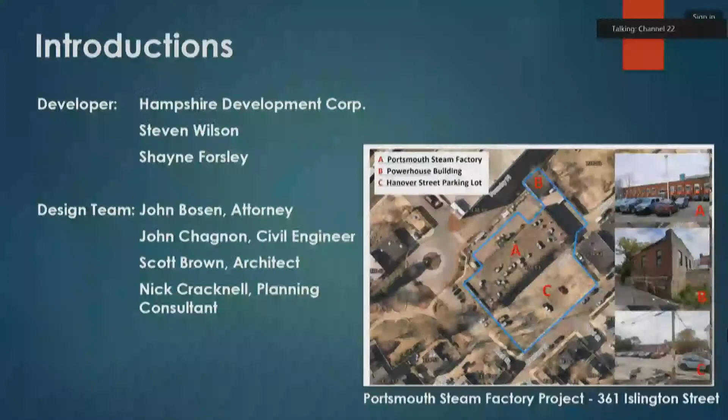If we could go to slide number 2, please. My client owns the property at 361 Hanover Street and intends to redevelop the existing historic building on the site into a multifamily building, and convert the existing parking lot into three multifamily buildings for a total unit count of 48. These 48 units will have all the required parking on site, and it will not be visible to the public. You can see that in slide number 2.

If you could go to the next slide, please. Next slide is the existing conditions, and I'll point that out to you so you can see the size of the lot. I won't go through the existing conditions in detail. They're all there, but I thought it would be helpful if you saw them just to visualize what the site looks like. This property, as you may know, has a long history of industrial and commercial use.

It was built in the 19th century as a 5-story brick and timber structure with a slab basement and a flat roof. In the late 19th century, there was a fire that reduced the building to 2 stories. In the 1950s, the property was used as an automobile dealership. Later in the 70s, it was used as an architectural firm, then a publishing company. Over time, this property became surrounded by residential uses. So there's no doubt that residential use with no commercial intrusion is the highest and best use of this property.

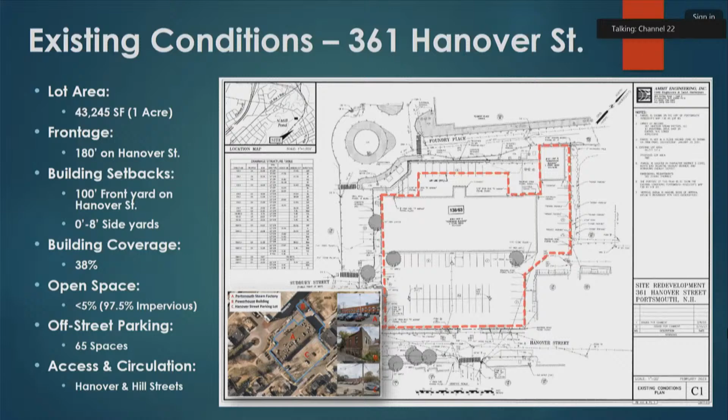Go to the next slide, please. This property is also subject to some complicated zoning. The property is located in the CD5 Character District, which allows for a variety of high-density uses, commercial and residential. These standards allow for 95% building coverage, footprints of up to 20,000 square feet, and just 5% open space. CD5 also allows flat, gable, mansard, gambrel, and hip roofs.

The property is also located in the Downtown Overlay District, which requires ground floor commercial uses, and off-street parking is not required. Lastly, the existing building on site lies within the North End Incentive Overlay District, which allows for an additional building story and requires both community space and workforce housing.

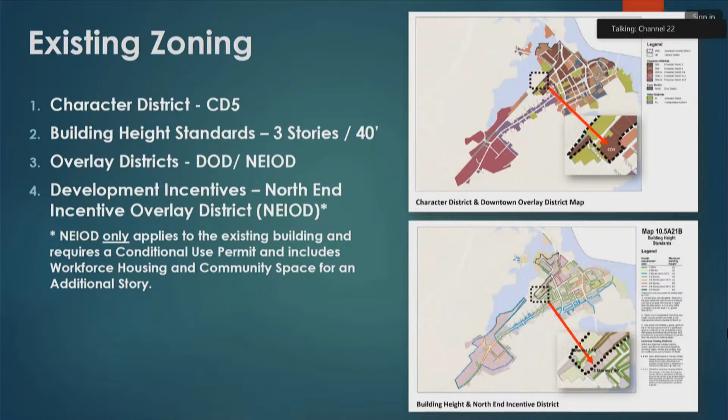This project has already been before the planning board for both a conceptual consultation and a design review, which we refer to as our vested as-of-right plan. If you go to the next slide, that depicts the vested as-of-right plan. This is what my client can build as of right, with no zoning relief.

I want to stress not only to this board, but to the public who've already made comments on this project, that this is a vested project, which consists of a 3-story building with a mansard 4th floor attic. It's 40 feet high, 95% coverage, 5% open space, and meets all required parking. It also has the necessary first floor commercial uses. The total unit count is 36 residential units, 6 commercial uses, for a total of 42 units.

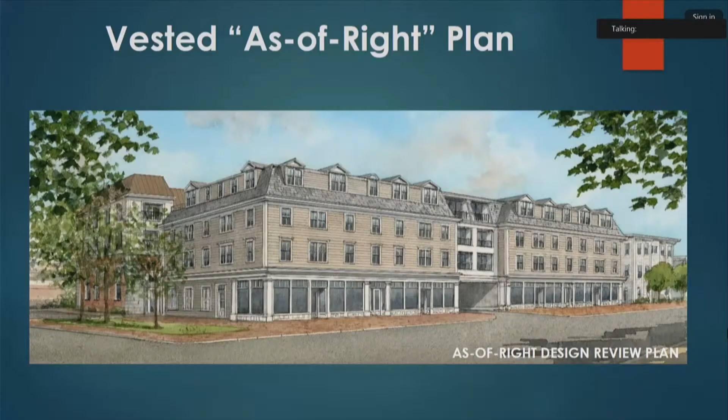After receiving feedback from city staff, many neighbors, and other leaders in town, nobody was really thrilled about the first floor commercial uses in this section of town. Commercial uses require no parking. It brings third parties into a neighborhood. It has the potential to create noise, traffic, and additional lighting.

So we went back to the drawing board and came up with another plan that we refer to as our CUP plan. Ms. Casella, if you could go to the next slide. This depicts what we refer to as the CUP plan. This plan has already gone before the planning board on July 18th for a conceptual consultation that was very favorably received. The CUP plan gets rid of the commercial uses on the first floor, and it breaks up the massing of the front building into 3 buildings.

We believe that this design is much softer for the neighborhood, and the buildings have reduced height and volume and better align with the lower density context of the southwestern side of the site. This plan also proposes to increase the height of the Kearsarge building along Foundry Place to help reestablish volume, height, and the historic characteristics of that building.

The CUP plan also removes the 6 commercial units and proposes ground floor residential uses for all 4 buildings, which is in keeping with the neighborhood. Total unit count for the CUP plan is 48 units. All 4 buildings have been redesigned to be more consistent with the historic characteristics of the surrounding neighborhood. This property is not located in the HDC, but these buildings were designed as if it were.

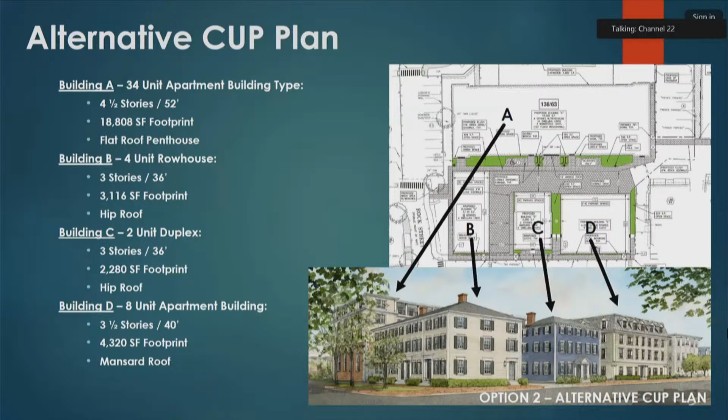In order to build this project, we need zoning relief. If you could go to the next slide, Ms. Casella. This slide depicts the zoning relief we need to move forward with the CUP plan. Primarily, it's relief from the ground floor commercial uses that are required in the downtown overlay district.

Second, we need relief from the minimum first floor height. If we were in the downtown overlay district, the commercial uses would require a 12-foot ground to floor height to support the commercial use, and also to have a ground floor level elevated above the sidewalk for privacy reasons. So we're asking that the first floor height be reduced from 12 feet to 10 feet.

The third variance is for penthouse relief on the Kearsarge building. Penthouse levels are limited to an area no greater than 50% of the gross living area of the floor below. There's also a setback requirement ranging from 8 to 15 feet from the edge of the roof, and these restrictions don't work for this project. We could build a mansard roof, but it's important to understand that the penthouse results in a more attractive building with actually less volume than the mansard, and I'll get into that in a little bit.

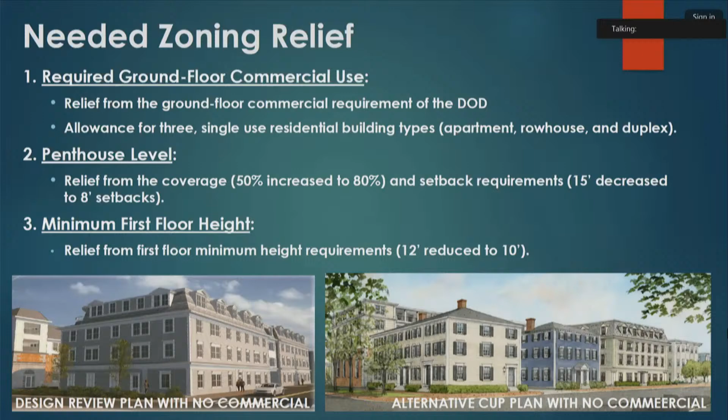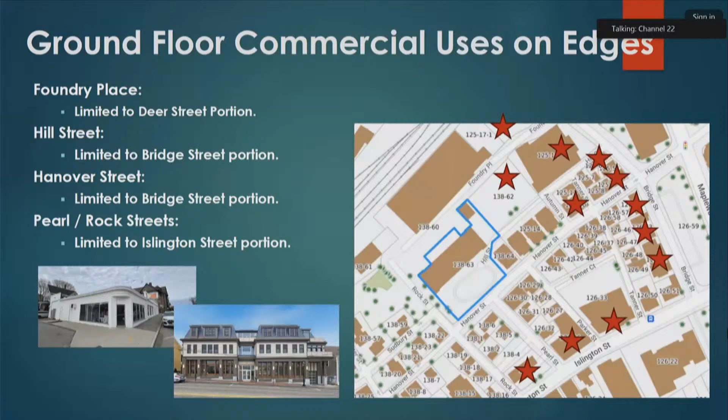First, granting the requested variance would not be contrary to the spirit and intent of the ordinance, nor contrary to the public interest. The test here is whether or not granting the variance would substantially alter the characteristics of the neighborhood or threaten the health, safety, and welfare of the public. In this case, if the variances are granted, there would be no change to the essential characteristics of the neighborhood, nor would any public health, safety, or welfare be threatened.

Properties located at the transition from the larger and taller buildings along Foundry Place and Hill Street to the smaller, more traditionally sized buildings along Hanover and Rock Street. Approval of the variance to allow ground floor residential uses would promote health, safety, and welfare of the public. This is a densely populated residential neighborhood where really no businesses should be located.

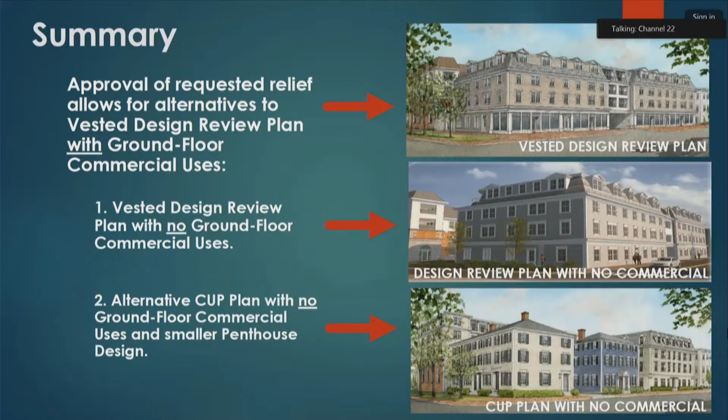If you look at the CUP plan with no commercial, and you look to the left, you see a 4th floor to that building, which illustrates a setback. It's over to the left of the chimney, and then a covered outdoor area to the left on the corner, which appears to be built out to the leading edge, but it's not. We didn't fully develop the architectural plan for that, but the guidelines for penthouses are well defined in the ordinance. We're hoping that, as our attorney said, it's actually a net reduction in rentable or occupiable area, but it softens the building from the street.

We had fully developed the plans for the design review plan that we previously had vested at the planning board, and obviously in this package there's no clear illustration of that penthouse. However, all the rules of a penthouse would still be in effect, and the architecture would be developed with the planning board.

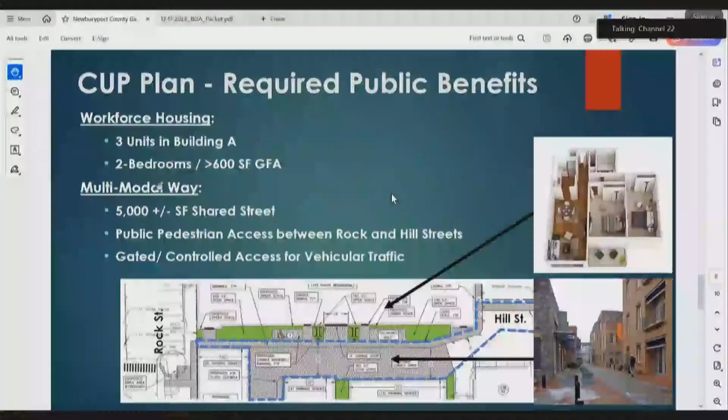There is a slide, Mr. Casella, it's called the CUP plan. Yeah, they're right there. That slide depicts Page 41, the community space. Oops, sorry, it's not working, but it's the multimodal way that you see right there that connects the neighborhood.

The Rock Street to Hill Street. So this is what I'm struggling with. Is that all behind the retaining wall that's along Foundry Way? The retaining wall is behind Building A. The answer to that question is no.

The multimodal way, if you look at Rock Street on the left, and you see the brick landing, the multimodal way extends from Rock Street laterally to the right on this plan, along the front of Building A and the rear of Buildings B, C, and D, between the buildings. A pedestrian or bicyclist would be able to pass between Rock Street and Hill Street, connecting to the sidewalk behind Foundry Place, the new building, right where it says Hill Street, to Rock Street. At this time, because my office is in the corner of Building A, right next to where it says Hill Street, that's already a pretty active pedestrian boulevard going through there. So we would have that open, and that would provide that multimodal way.

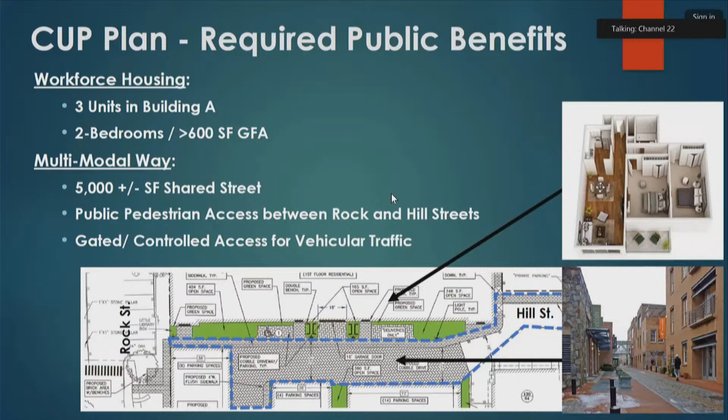Thanks for that. I've got additional questions here. I'm not sure who I'm asking them to. Okay, I'm a little confused on the discussion of the height of Building A. Now, I may have misunderstood what you were saying. Were you saying that if you didn't get the penthouse on Building A under the CUP plan, it would be bigger than the as-of-right design, or were you saying it would be bigger than the building would be if you get the penthouse?

Okay, so I'll directly answer that question if I can preface it, because it was a little confusing in the narrative, in the discussion tonight. The way I view this is the elimination of the commercial and the acceptance of the apartment row house design that you see here are, in my mind, a separate decision for the developer, and I think subsequently for you.

The elimination of the commercial level in the buildings, if we go back to the slide that shows the CUP plan, actually allows us to lower the overall elevation of Building B and Building C. So instead of adding another story of residential, we've actually eliminated the lower level of residential. And so those buildings in stature are well under the 40-foot allowed by the current zoning. That allows us to terrace the property from the 60 and 70-foot buildings on the northeast corner and transition to the residential neighborhood on the southwest corner of the project.

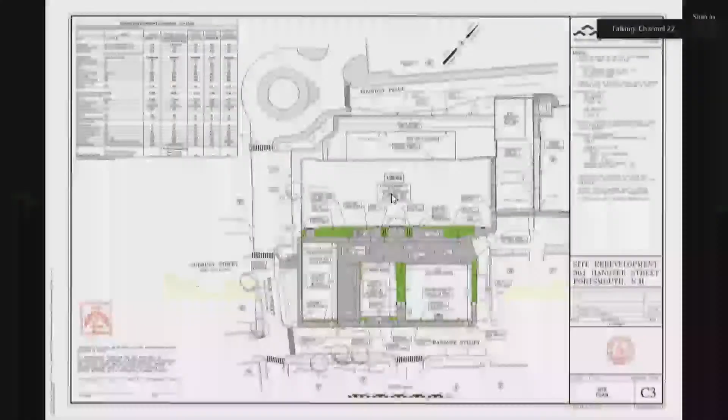So Building B sits on the corner and it's 3 stories. Building C is the blue one in the middle. Building D is the green one with the mansard roof. Why do I see almost nothing of Building A? Does it not have another side to it? I feel like I don't know anything about Building A. I have no picture of the penthouse, even though you're asking for a lot of relief for it. I'm not sure I have enough information, so tell me.

I think what you see in the penthouse is what you see—there's not a lot of design elements to it. We didn't fully design it because until we have the relief, it didn't make sense to go to full design review.

But how do we grant the relief without seeing what the penthouse looks like, or what it looks like from another side? It's 52 feet. I think the best comparison is—I forget the slide number, maybe slide 7—but you'll see the view of both buildings, what we refer to as the design review plan and the CUP plan. They're 2 completely different looking buildings.

I think your eye is easily more drawn to the alternative CUP plan. But yes, there's not a lot of architectural detail on the penthouse. Normally we do see those.

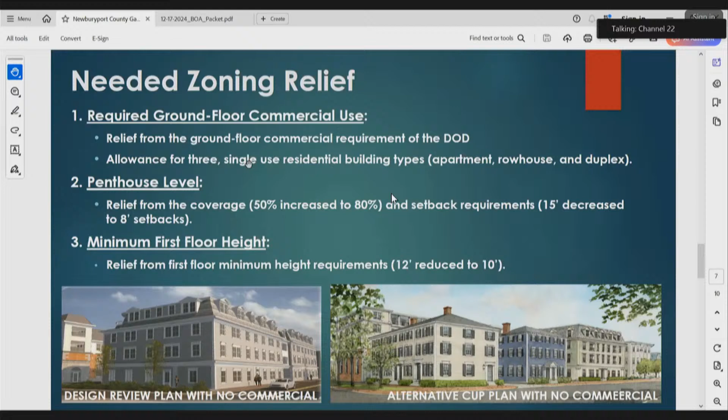Mr. Wilson, you have something to add? Just two things. First, in our broader submittal, there's no slide here for it, but on page 12 you'll see a picture of the back building from the front in the as-of-right condition. Also, we submitted floor plans to staff at the planning department, and she may have access to that right now to throw up on the screen. More floor plans than we had.

I want to say, we didn't mean to usurp your right to see the penthouse as it's going to be, but I did fall short of engaging the architect to do a full-blown rendering of that area. I felt that would be okay.

That's unusual for a decision for us. Yeah, okay, I'm getting that now, Chairman.

So, excuse me, I do want that portion, that variance, to have its best opportunity to be accepted. And I don't want to try to talk you into that, okay? So far we don't know if anyone else agrees with me, so we can... yes, Mr. Neal.

Could I follow up on that point a little bit? Yes. On page 20 of your package, which is page 42 of our package, there's a figure 12 which shows Building A and, I think it's Building B next to it. Looking at that, it seems the first floor on Building A is much higher than the first two floors of the building next to it.

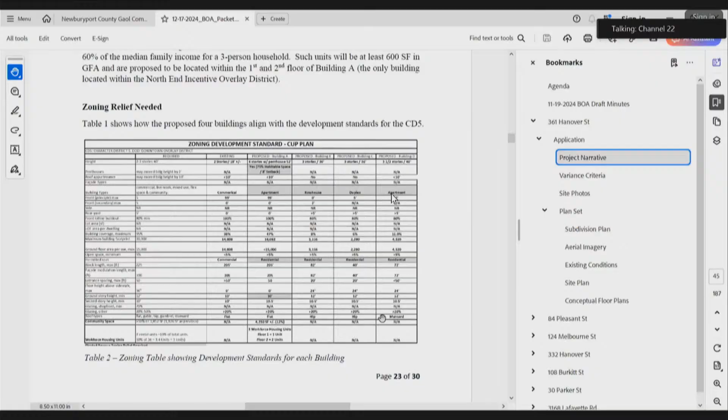So after going through the package again, on page 20 of the submittal you'll see a much closer view of the four-unit townhouse building, or row house, and you see the architecture behind it. That is all I have to show you tonight.

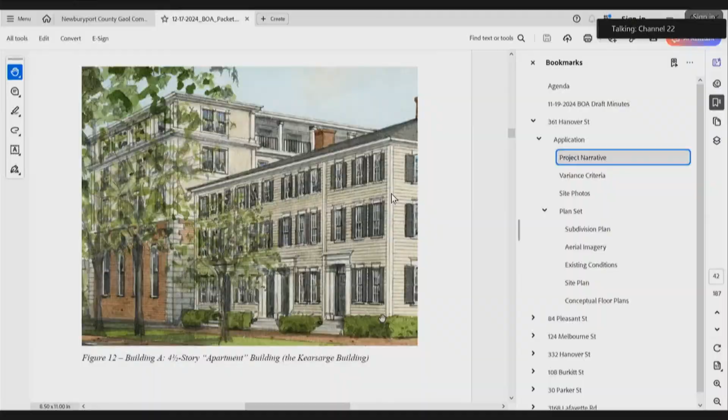If I'm understanding that it's important to that particular variance tonight, as a matter of suggestion—and I don't even know if this is possible for the board—I'd be happy to table the vote on the penthouse in order to better illustrate it and have a better chance of a positive outcome. I'd ask that we could move forward with the first floor commercial and apartment building type request, because I feel as though they really are disjointed. So I don't want to press the wrong answer out of the board without proper information on the penthouse. It's up to us if we want to go ahead this way.

Yes, Beth? I'm a little reluctant to start bifurcating the application, just because it really holds together as a package. I think the height of the penthouse is properly before the planning board as a CUP. But that said, you are asking for relief from the gross living area percentage and the penthouse setback, and we really would need visual representations of that, and have the board be satisfied that we have enough adequate information to make that determination.

I think I would prefer that we do this kind of all at once. I feel insecure about Building A as it is, penthouse or no penthouse. So, yes, Mr. Neal.

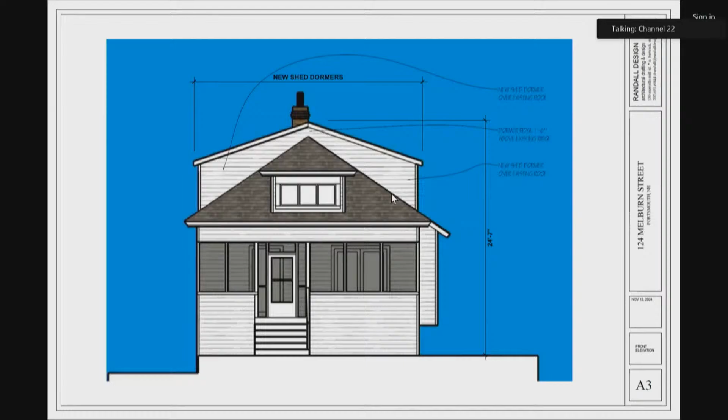I believe, and as I think you might recall from last month, the way the city defines building height is something that sometimes escapes me. I believe, depending on the pitch of the dormered roofs that we're proposing, you would not necessarily go to the peak. You may actually drop down to the midline between the peak and the eave. Yeah, but either way, we're well below the 35 foot. But yes, there will be an increase in height.

And whether or not it's 1.5 feet, I thought it was closer to 7 inches, but I'm just reading that it says dormer ridge 1 foot 6 inches above existing ridge, which, looking at all the existing photos, the ridge sort of carries through for the length of the building. So I guess you can call these dormers, but really we're adding a second story to this. That's basically 1.5 story-ish. That's fair.

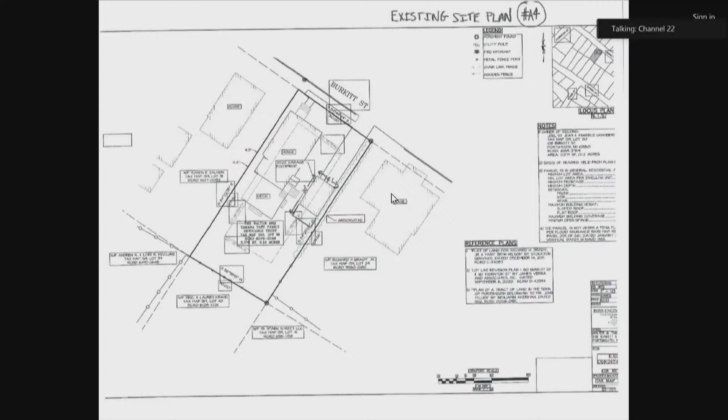Unless there are questions, I'll go through the criteria. Okay, go ahead. No, you have a question? Okay, yes.

Looking at the site plan drawing, there's a note that I think maybe is leftover from something before, where it says size of the garage after new garage. Is that the new garage that's already there, isn't it? There is a new garage that was built by the prior owners, yes.

Did you consider any other locations for the air conditioner? Since you're removing the existing mini split on that side, did you consider, for example, putting the air conditioner on the other side of the house where it would comply with the setback but be nearer the driveway? No, we basically thought leaving it in the same spot where the electrics are currently tied to that area would be the best spot for it, since the condenser's already in that spot. Okay, thank you.

Continue. Okay, so regarding the variance criteria, 10.233.21, the variance will not be contrary to the public interest. The new 18-foot by 10-foot second-level addition is intended to stay within the beautiful character of the neighborhood. Many houses on Burkitt and in the surrounding neighborhood have additions in the rear of the house. The proposed improvements will have limited sightlines from the street and will be restricted to 2 stories high. There is no threat to public health, safety, or welfare.

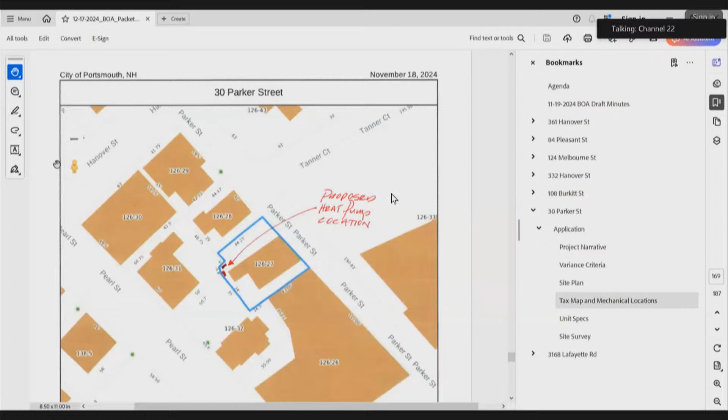Actually, if you go to the last page, that's the survey plan. Well, actually, that's a good one too. I wanted to show the tax map to show kind of how the buildings are oriented on that property. And actually, there you go.

We've got a building right on the property line on the south side, the driveway's on the right-hand side, and then the rear, there's a tiny little yard, and then there's a funny little jog in the rear, which, if we go to my drawing now, we're trying to figure out a best place to put these heat pumps.

And we have a shed and porch passage that was approved months ago. I was hoping to be able to put it in front of that little bump out, but we have an access to a crawl space there. So basically, I'm locating it there.

Well, the other thing I wanted to talk about is the fencing doesn't follow the property line when we had the survey done. My client discussed with 126-31 if they wanted to resurvey theirs, and we just decided we're going to leave the fencing as it is. So that's why the setbacks are as they are - that one heat pump is sort of sitting out in the yard for the future when that fence does get changed.

So basically, we're trying to tuck them into a place where they aren't visible to the public and they're the furthest away from all these other abutters in terms of the triangle from one to the other. This seemed like the best place to put that without compromising the one little bit of rear yard that they have. And just had pictures of the units. And I think that was it.

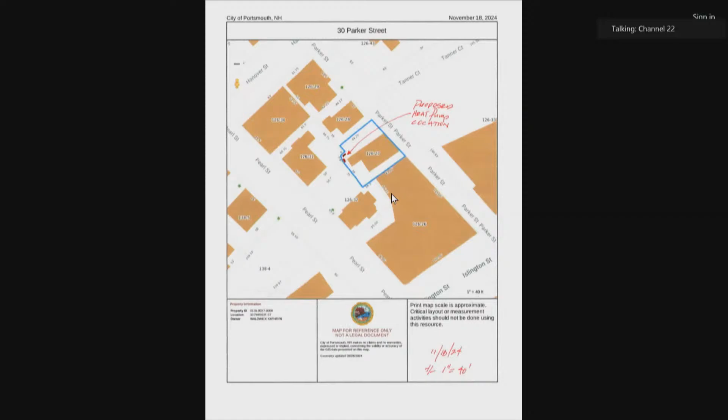I'll go over the criteria. Variance not contrary to the public interest: the many properties in this neighborhood are non-conforming to building area and setback. Heat pumps are located to provide the best separation from abutting buildings and to maintain the small rear yard. The variances are consistent with the spirit of the ordinance and will allow this variance with minimal impact without adversely affecting the abutters in the neighborhood. Substantial justice will be done as the variance will allow, again, this best location from both the neighborhood and the owner's perspective. Variances will not diminish the value of surrounding properties, and the special condition of this property is the nonconforming of the existing residence to front, rear, and left side setbacks, and the irregular shape of the rear property line.

Any questions? Are there questions? Okay, thank you. All right, I'll open the public hearing.

Does one need to do this? Is there anyone to speak in favor of this petition? Is there anyone to speak in opposition to this petition? Is there anyone to speak to, for, or against? Okay, the public hearing is closed.

Anybody? I'll make a motion to approve the variance request as presented. Is there a second? Thank you, Mr. Nies. Okay.

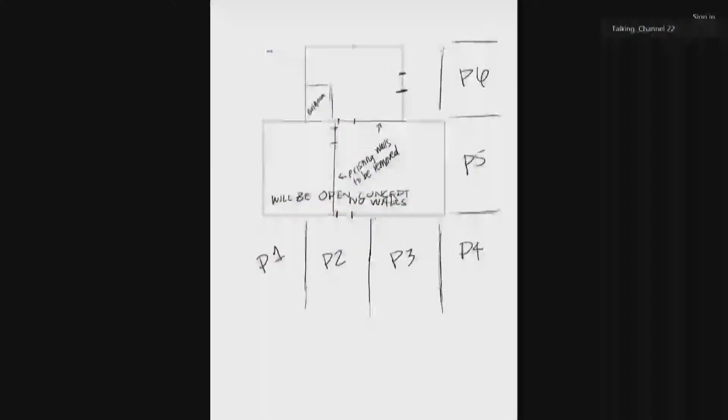First and foremost, I just want to say that I am a small business owner. I'm currently working out of Durham. I own Scarlet Rose Studio. It's a clean, welcoming tattoo studio and was just voted the 2024 runner-up in Best Tattoo Shop in a People's Choice Award, the best in Seacoast, which is a huge feat for us because we've only been open for 2 years. And quite honestly, I didn't even know we were nominated. So it was really great to get a phone call and just be like, hey, you won this. I'm like, won what?

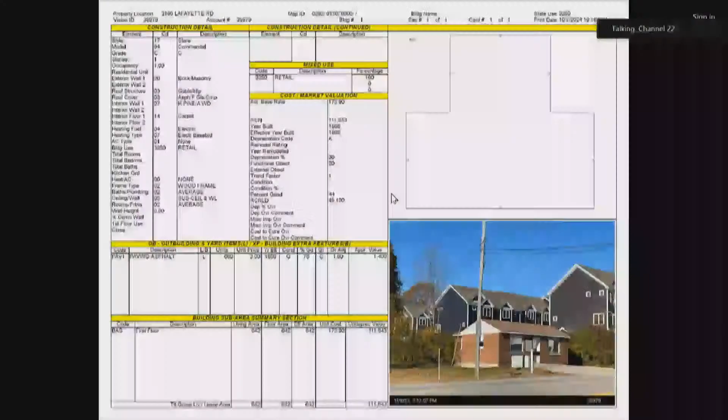But I've worked really hard to build a reputation of warmth and kindness since I began my tattooing journey in Newmarket. I opened my own business, and I think it's a testament to my professionalism and commitment to my clients' autonomy, health, and safety. These are qualities of small businesses that I'm hoping to bring to the Portsmouth community. I'm looking to expand my business and become the property owner of this place. It's located at 3168 Lafayette Road, and it's a perfect little storefront I've been looking for, and I'm here to plead my case for you to allow this current commercial space to continue to remain commercial.

As per Article 2, Section 10.233.20, the dwelling is already used for a small business, so the only change to the public is a change in what small business will be operated out of the location. Approval of the use variance will only serve public interest. I believe my business will not only be in the public interest, but will hopefully pique public interest and even draw some business from surrounding areas. My clients come as far as Connecticut to get tattooed by me.

The public interest in tattooing and body art in general has only seen an uphill climb since the stigma has been diminished. I believe the addition of the studio to this area will increase the value in the surrounding areas as well as draw public interest to the world of body art.

As for the spirit of the ordinance, 10.233.22, the spirit of the ordinance will be observed. Tattooing not only promotes health, but encourages positive self-body image and freedom of self-expression. The positive influence of tattooing has increased tenfold as we grow as a community and embrace people of all shapes and sizes. The negative connotation of tattooing has decreased tremendously as people are letting go of the stigma and discrimination of the past. We are seeing more and more people getting memorial tattoos to work through their grief, or even covering self-harm scars with tattoos as a way to cover up past trauma and move on with a positive body self-image.

As per 10.121, the spirit of the ordinance will most definitely be enhancing the visual environment. Art is quite literally what I do. I definitely plan on cleaning up the building, and it will be more visually pleasing and add value to the property and to the surrounding area.

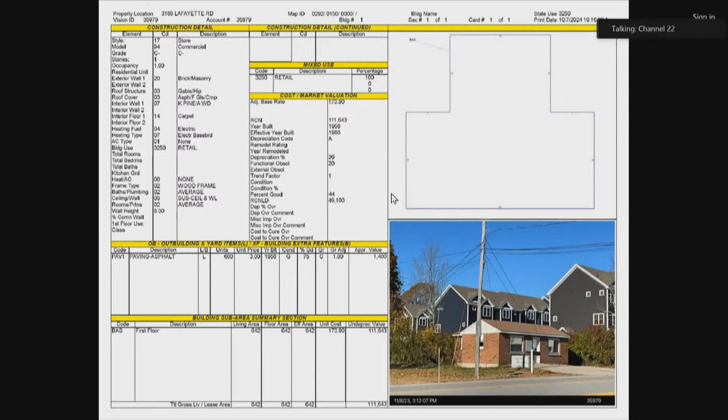10.23323, substantial justice will be done. I have read, interpreted, and provided justification to the city's zoning ordinance to the best of my ability. I am not very well versed in it until just this week. Furthermore, I have had multiple conversations with members of the city's planning board.

I'm trying my best to navigate both the ordinance and the process. Substantial justice in this case would be that the building would continue to be allowed to be a commercial space. It's completely unfeasible for it to be residential. It's 642 square feet. There's no kitchen, there's no shower. It would be quite an undertaking for anyone else that buys a property to turn it into something that would be usable space for living.

And not only that, but it abuts Lafayette Road pretty directly. It's a huge commercial street. It's been a commercial space for over 20 years, even though the zoning has since changed since the property was purchased. It's a non-conforming building for an SRB family to use. It would be completely unfair to put a family here with the building having none of those aforementioned things.

10.23324, the values of surrounding properties will not be diminished. The addition of a tattoo studio would be no hazard to my surrounding neighbors. We're a single use for everything we do. Tattooing has become very well regulated and safe. There'll be no detriment to the surrounding property values either.

As I had just stated, I do plan on cleaning up the building. She tends to have a lot of headstone stuff out there. I'm going to be cleaning up the front, maybe putting in some shutters, and just making it look a bit more visually pleasing. The increase in traffic is highly unlikely as I only see one or two clients per day. My typical workday is just one-on-one with one client, or maybe two, for up to 8 hours a day. There'll be no excess of water, sewer, or runoff.